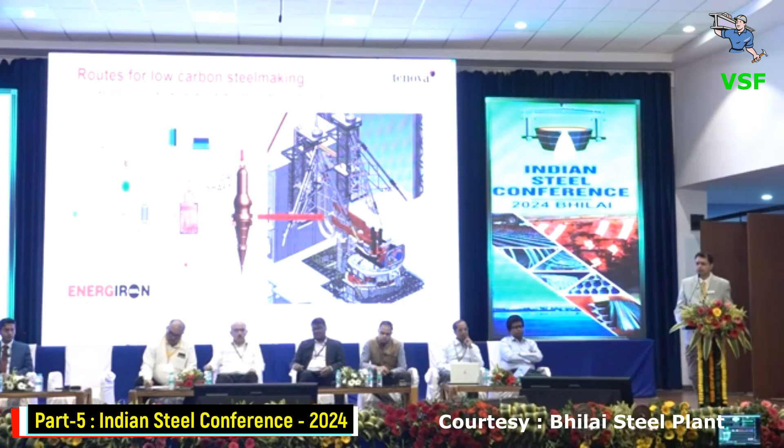Here you see one plant, around a 300 ton electric arc furnace, where they are putting in DRI, hot DRI, with two DRI feeding points, working basically in an oxidizing mode. This is conventional 100% hot DRI, hot meaning HBI DRI.

In Algeria we already commissioned this plant in 2018, and we commissioned a second DRI plant a few months back. This is electric arc furnace based.

Then these are some of the references. I'll just skip this because it's well known that melting DRI into an electric arc furnace is a standard process.

Now I'm coming to the other aspect, replacing the blast furnace. How can we replace it? In the existing route you use BF grade pellets. The challenge we were discussing in the morning is how we can replace or utilize the BF grade pellet. It doesn't mean that if you have BF grade pellet, it's mandatory to use a blast furnace.

We can also put it into the DRI process as high carbon DRI, melt it, and make pig iron. These are some of the schemes which are already implemented.

I'll just skip this. This is what we call iBLUE, hot metal via open slag bath furnace. By look and appearance it appears as if it is a submerged arc furnace, and here we are basically using blast furnace grade material.

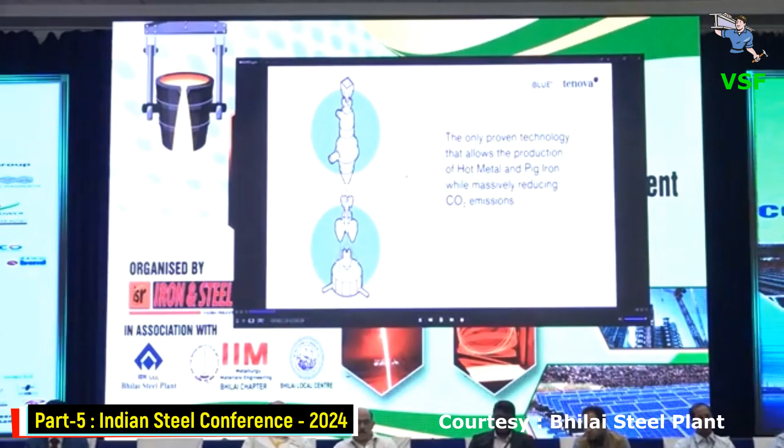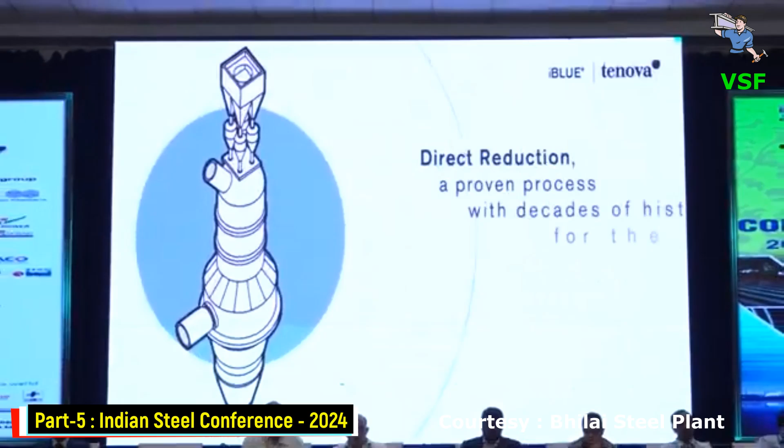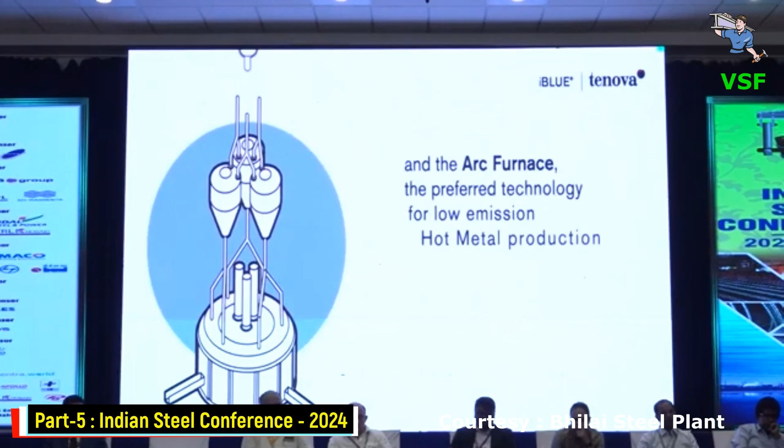Reducing CO2 emissions. Direct reduction, a proven process with decades of history for the production of high carbon DRI, and the electric arc furnace, the preferred technology for low emission hot metal production, are now combined into one integrated new process, iBLUE. Iron ore pellets, either BF or DR grade, are progressively reduced from oxide to metallic iron, and then further converted to iron carbide.

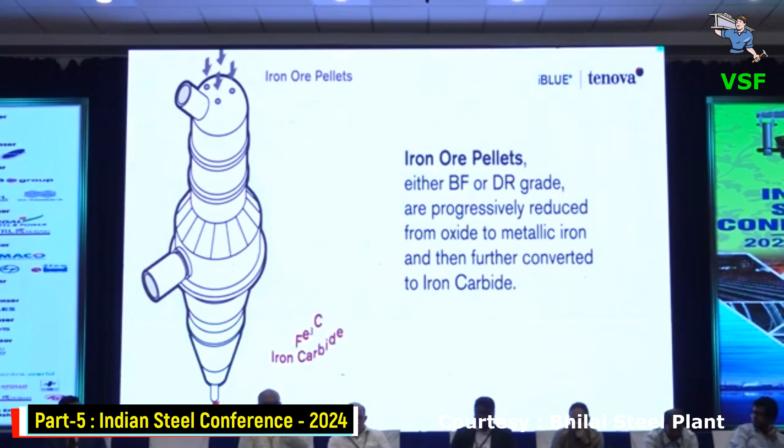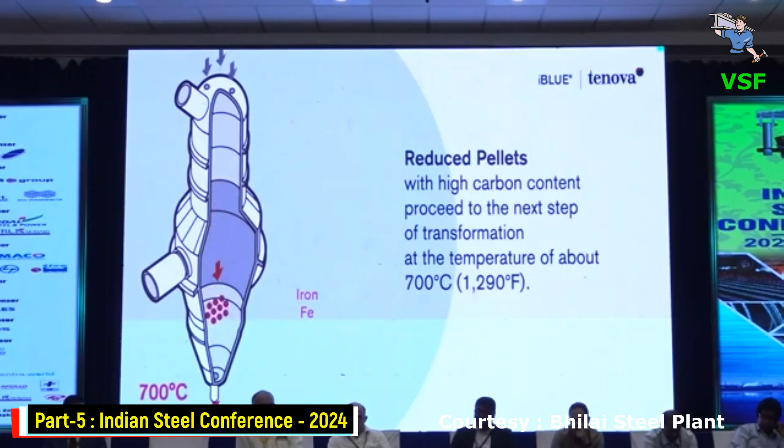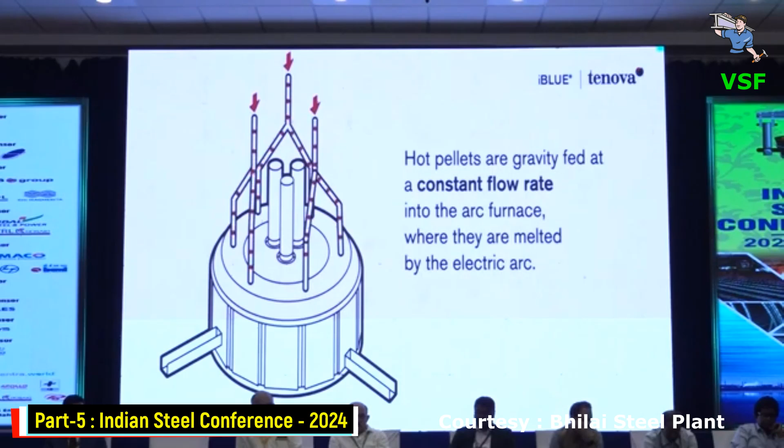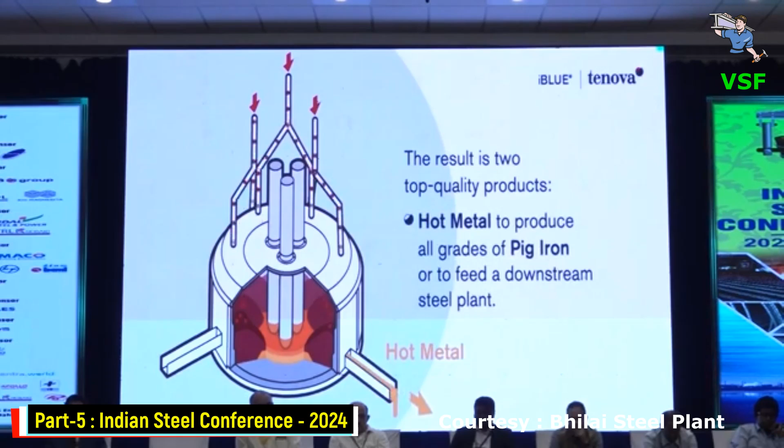Reduced pellets with high carbon content proceed to the next step of transformation at a temperature of about 700 degrees Celsius. Hot pellets are gravity fed at a constant flow rate into the arc furnace, where they are melted by the electric arc. The result is two top quality products: hot metal to produce all grades of pig iron or to feed a downstream steel plant, and granulated inert slag for the construction sector or other industries.

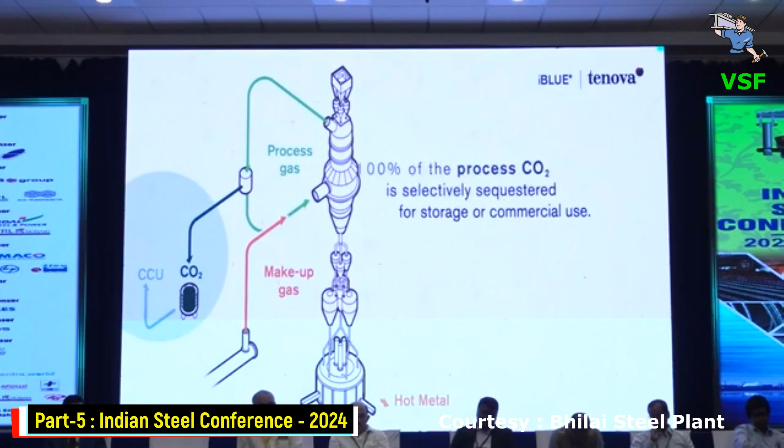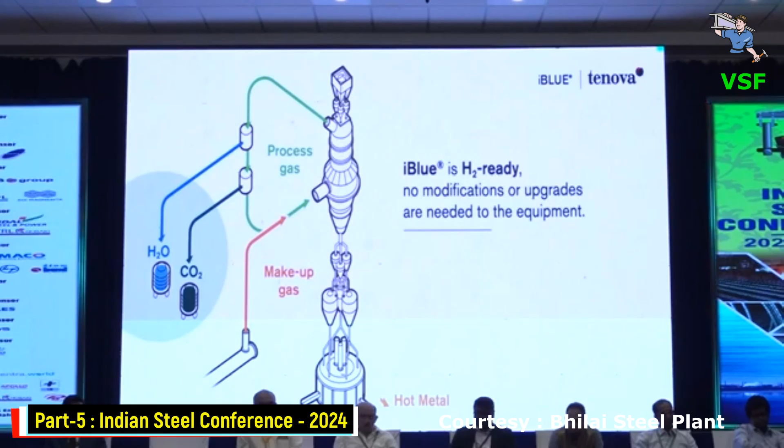100% of the process CO2 is selectively sequestered for storage or commercial use. Water vapor is also emitted from the process and is recovered as a cooling fluid. iBlue is H2 ready. No modifications or upgrades are needed to the equipment. H2 can be added in the makeup gas at any time and at any ratio, maintaining maximum efficiency.

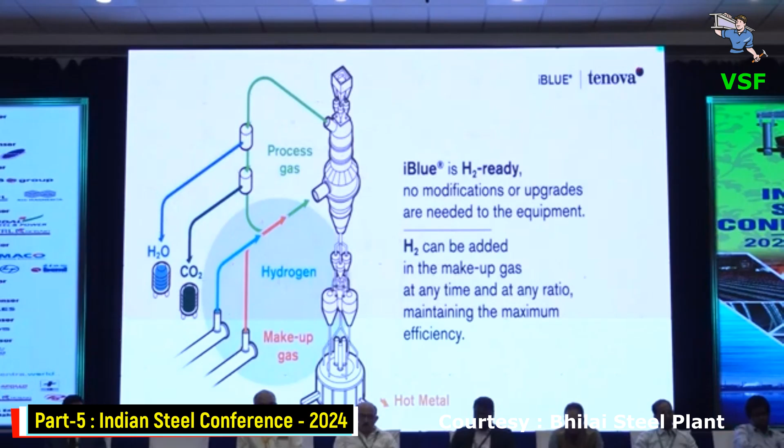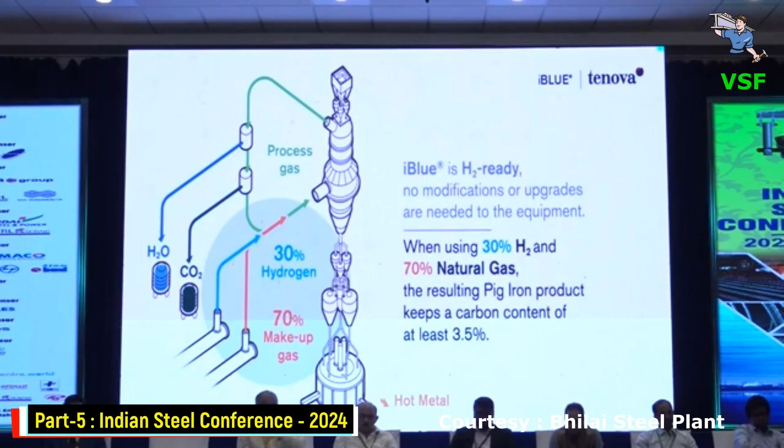When using 30% H2 and 70% natural gas, the resulting pig iron product keeps a carbon content of at least 3.5%. iBlue also allows the use of 100% H2 as the makeup gas. In such a case, the process emission is only water, and the final metal product is liquid iron.

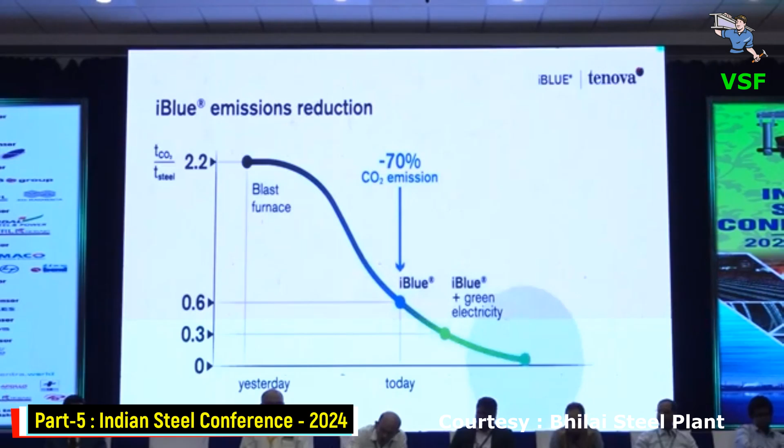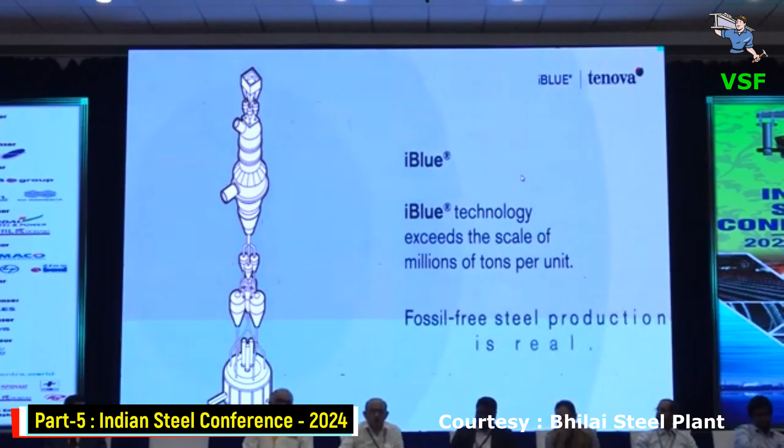iBlue technology exceeds the scale of millions of tons per unit. Fossil-free steel production is real. Tenova.com. Thank you.

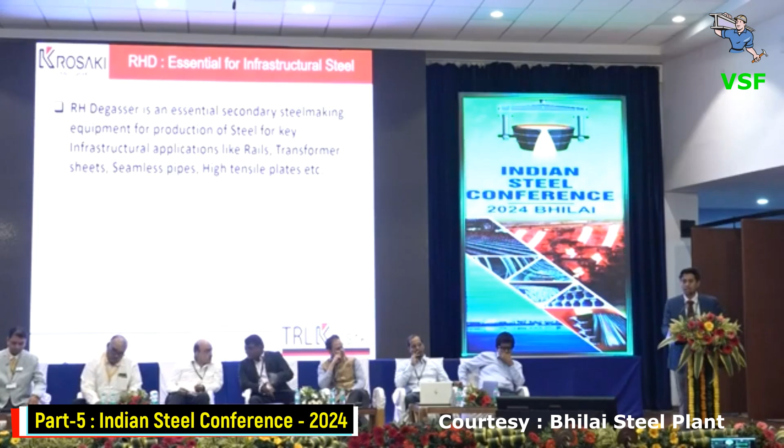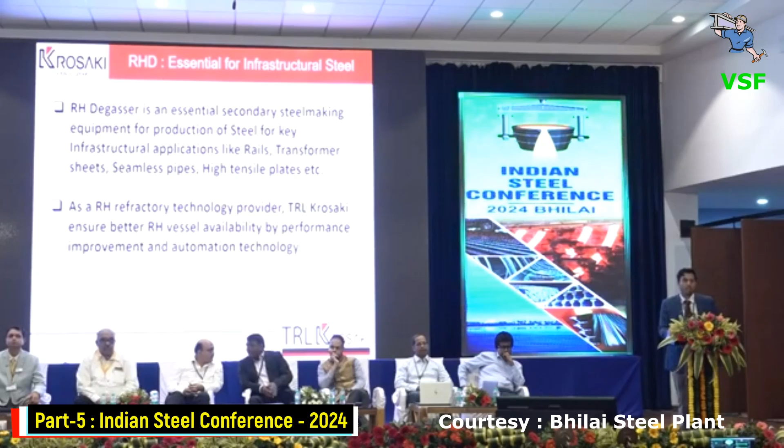RH degasser is an essential equipment for secondary steel making, and it is key equipment for producing infrastructure application steel like rail steel, transformer sheet, high tensile plate, etc. As a technology provider, I will explain how we can give better RH vessel availability through improvement of performance and our automation technology, and I will also cover the initiatives taken to reduce the carbon footprint at our site.

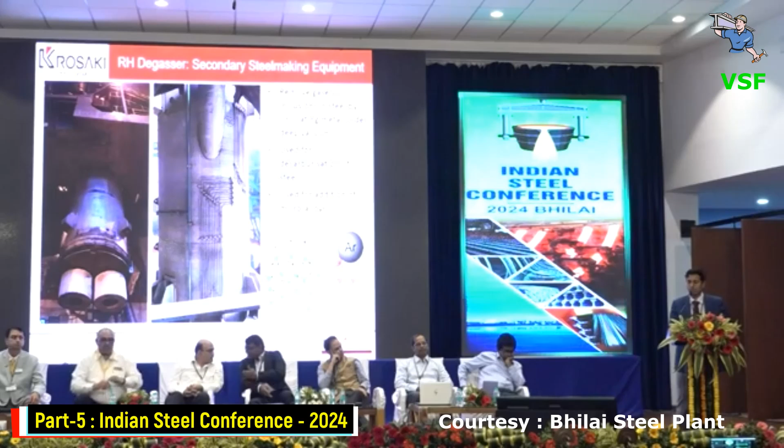So first, the secondary steel making equipment RH degasser - I'll give a brief introduction. It is mainly used for removal of gaseous inclusions in the steel, and also for adding some micro-alloys.

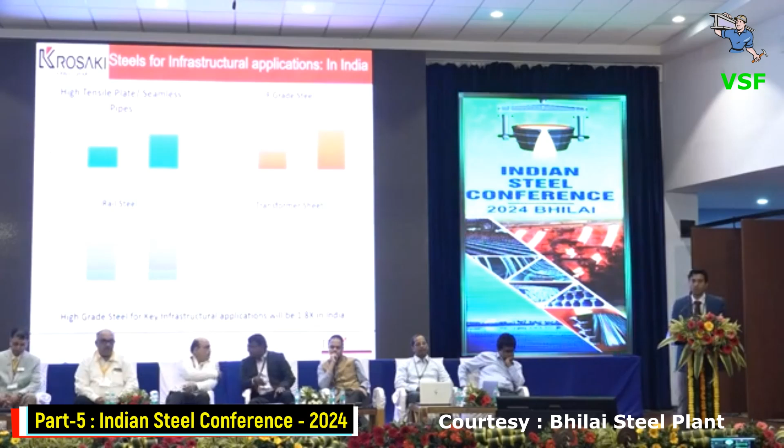If you see the current production of high tensile plate, IF grade steel, etc., currently around 9.7 million tons of steel is produced in India through the RH route, and in year 28-29 it will be around 16 million tons of production - that's the forecast. So to cater to this production, we need to improve the performance of the RH degasser unit, and also ensure we can reduce the downtime of the vessel.

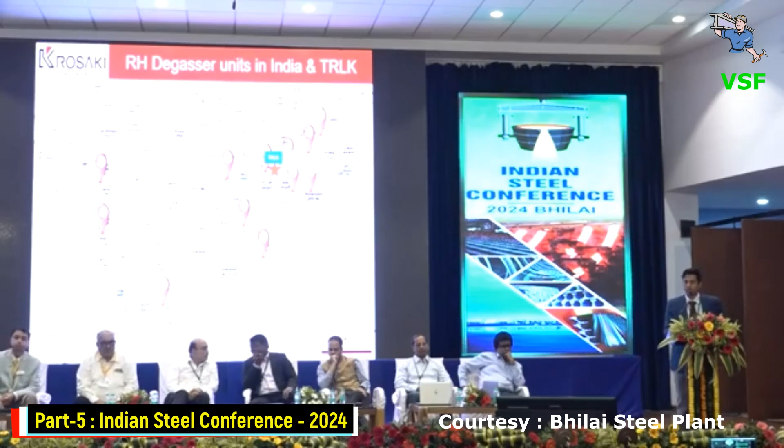So here the star is the TRLK, and all others are the steel plants who are using the RH degasser unit, so we are in close vicinity. If we see the performance of TRLK, it is currently holding the major business share in RH degasser unit, around 42% share is with TRL Krosaki.

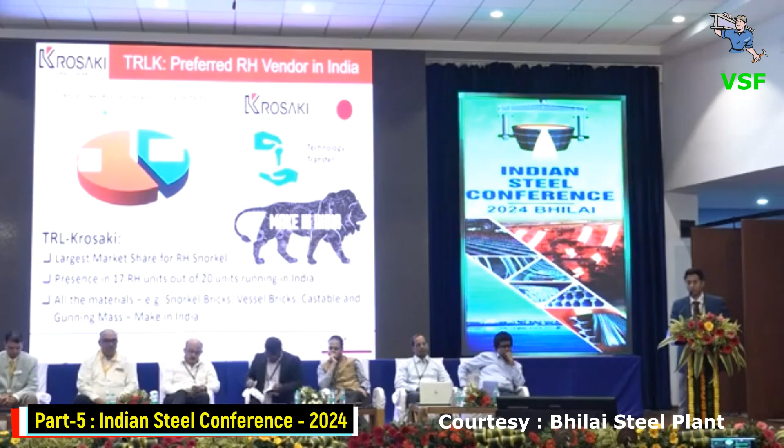What makes TRL Krosaki the most preferable vendor for the steel industry is that we are using the technology from Japan, and through technology transfer we are making in India all the products for the snorkel, vessel brick, alloy chute, and gunning material. So all the products are made in India.

Apart from that, we are also holding the performance record in various customer sites like JSW Vijayanagara, SMS1, SMS2, RH2, JSW Dolvi, that is 350 metric ton RH degasser. During commissioning stage we hold the world record of 63 hits, and we are currently holding the benchmark performance there. In Tata Steel Jamshedpur, we achieved 263 hits, the highest life in India.

Apart from India, we are also supplying our snorkels abroad, like British Steel and other customers, Tenova and others. So actually we are supplying all the materials from India, so I am not going into details.

We are also mapping the damage factor of the snorkel and lower vessel, and how the damage factor affects the snorkel. We map the product and design it as per the damage factor of the snorkel, focusing on spalling resistance, erosion resistance, HMR and structural stability.

Apart from that, we also focus on the simulation part - how simulation helps us check how it affects snorkel performance. Through simulation we can find out the outer castable damage pattern.

To accomplish this, we have developed a new gunning material for repair, focusing on fast stickability, water demand, volume stability, low shrinkage, and high HMR. These are the key properties we focused on when developing our product.

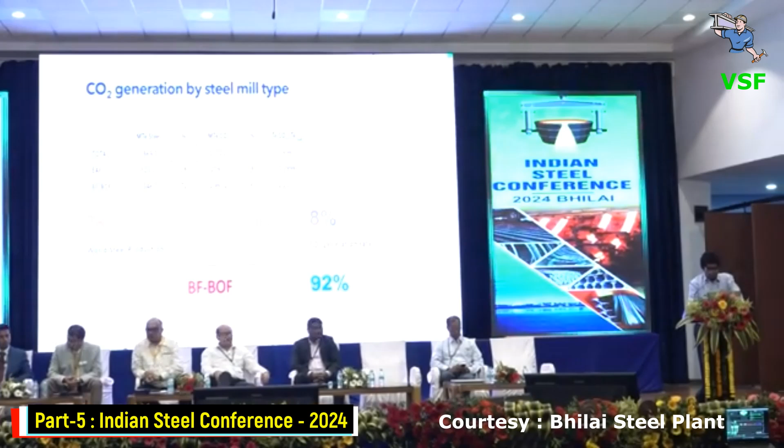So basically this is the CO2 generation by steel mill type. As we all know, the blast furnace BOF route is primarily responsible for the catastrophe, accounting for 92% carbon dioxide generation, whereas EAF mills account for only 8%.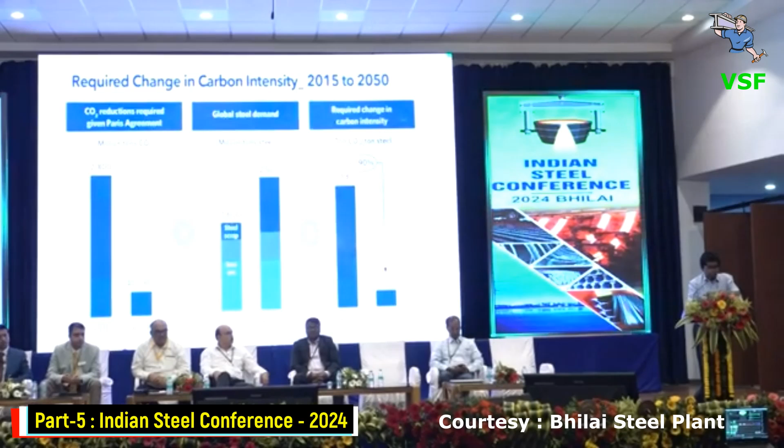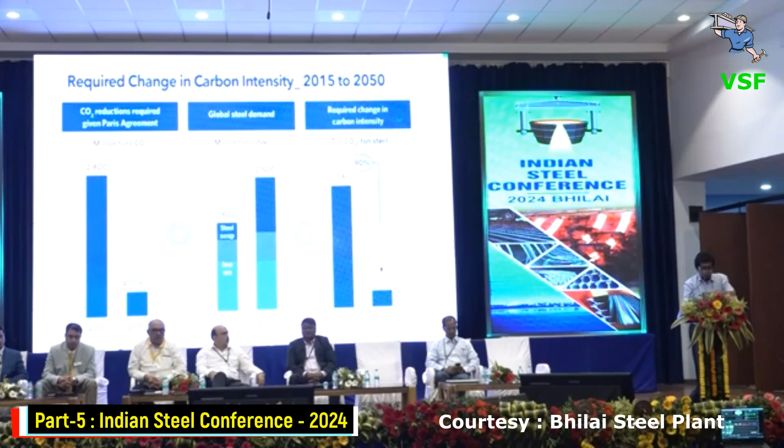With the task of reducing CO2 tonnage per ton of steel, when the Paris Agreement happened in 2015, the task is huge: from 1.8 down to around 0.2, which is around 90% reduction. So a lot of things need to be done.

Now I will discuss the logistical challenges for integrated steel plants and the DRI dilemma. There is always a dilemma about which process is fruitful. An often highlighted carbon emissions reduction strategy is to shift from blast furnace to electric arc furnace production, but the two processes are not exactly direct substitutes, because in EAF you don't have the metallic iron as such. You cannot use iron ore directly, whereas in blast furnace you have the liberty of working with iron ore.

Most importantly, an increased use of the EAF process requires an increase in the supply of recycled scrap steel back into the system to enable the shorter and less carbon-intensive process.

So basically, full decarbonization is possible using electric arc furnace with scrap, increased usage of DRI in the furnace, and DRI plus EAF using hydrogen - this is the Midrex as well as HYL DRI process, but these technologies are available at high cost.

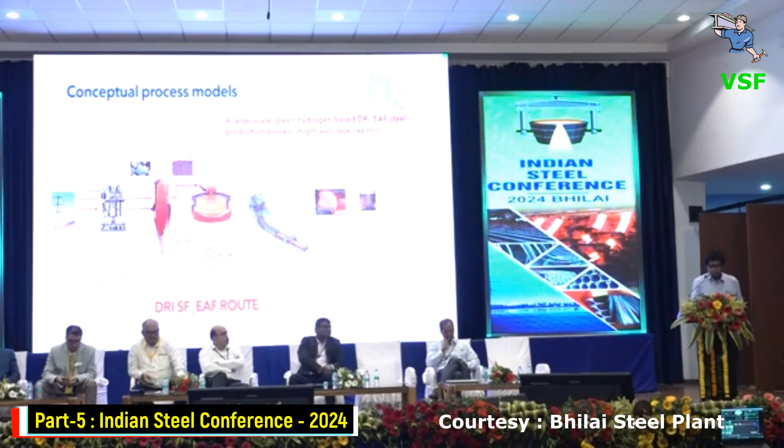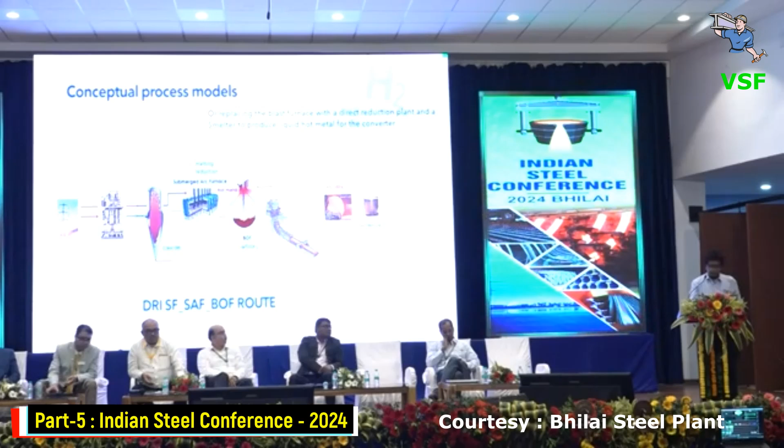Or it may well look like this also: DRI, submerged arc furnace, and the BOF route. Here we will be able to produce hot metal from this carbon-free DRI in the submerged arc furnace and then continue with refining in the furnace.

So what is the implication of using 0% carbon DRI or HBI? Primarily, most important is that you will be requiring more energy, because the temperature at which the steel melts increases with decreasing percentage of carbon. This temperature will increase definitely.

And thermodynamically speaking, when you talk about low carbon steel, you normally produce more FeO in the slag, which calls for lower yields. Also there will be less available in situ chemical energy in the DRI because of almost no carbon.

Other carbon sources will be needed because of FeO, DRI reduction, foamy slag - all those parameters have to be taken care of in any case if you want to produce steel in the furnace. Then you would be requiring vigorous bath stirring.

Because of less carbon, the churning of the bath will be supposedly less, so you need artificial bath stirring from the bottom. And all this will probably lead to more refractory wear because of longer melt times, then erosion of magnesia carbon bricks and carbon dissolution.

And so we need to think or rethink about the refractory systems that go into these steel making parameters.